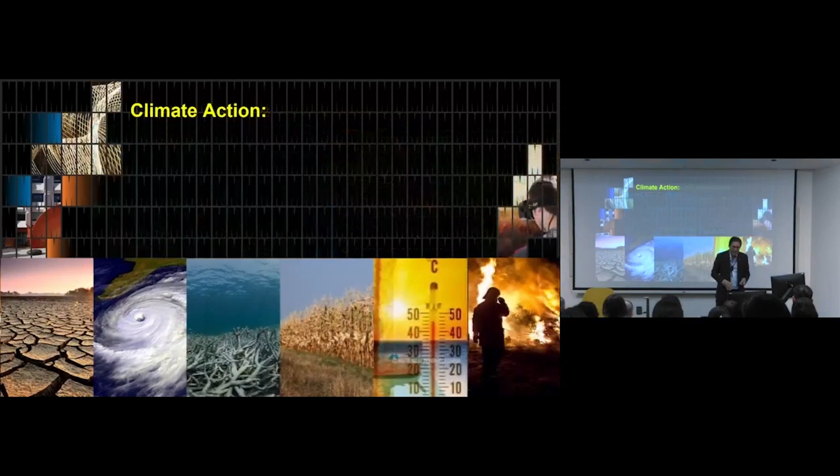Why it is significant is that there is a realization that with temperature increase, change in climate is before us, is here. Whilst the effort to try to control and reduce emissions and reduce temperature rise is still very important, we actually have to act very quickly on initiatives for climate adaptation. Because you can reduce your carbon emissions as much as you like, but the reality is that there are extreme events happening that would not normally happen in the past. Now, with climate adaptation, I just want to make this point: a significant part of the impacts of climate change are manifested through water.

Droughts, floods, pollution and degradation of water quality lead to diseases, or indirectly impact food security, public health, even how we respond to heat waves and wildfires. When you look at the context since the beginning of climate issues, climate mitigation was the real focus, and it seemed to be in the domain of the energy people, while we were largely sitting on the side looking at what's going on.

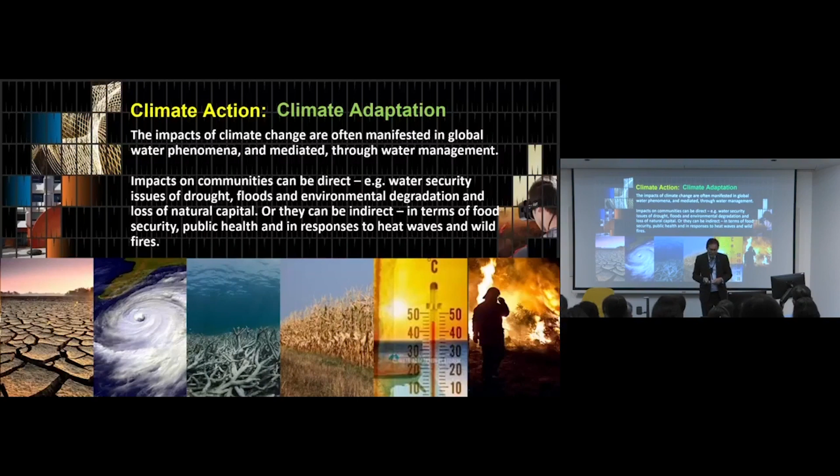But that shift to climate adaptation, and the realization that so much of climate impacts are manifested but could be mediated through water, really requires those of us in the water sector to step up and take leadership in climate action. Now, I come back to the Agenda 2030. My research group looked at the 169 targets in the 17 SDGs and asked whether water management would directly contribute to attaining those targets. Our conclusion is quite compelling: 50 of the 169 targets are directly influenced by how you manage water, and a further 34 are indirectly influenced. All of the targets under SDG for sustainable cities and communities are influenced by water in one way or another. Of course, water and sanitation goes without saying, but even industry, innovation, and infrastructure - water can help support that and a whole bunch more.

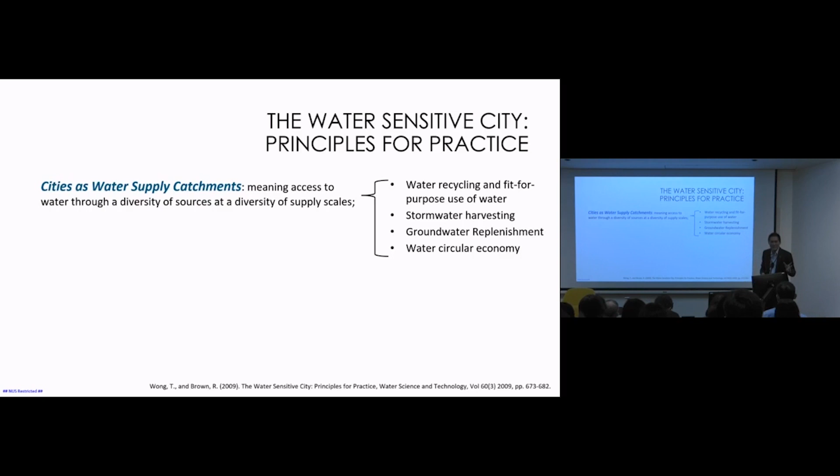And what are some of the practical examples that you can refer to with this principle? I'll start with Singapore. Singapore, over time, has actually developed a policy that ultimately led to its Four National Taps policy. Yeah? It is really a strong effort to do that. And ABC Waters was in fact chasing, if you like, the last bastion of water sources—rainwater, stormwater—not a drop to be left unharnessed.

But that is, if you like, the type of policy position that drives this concept. It may not be, and I am sure it wasn't, when PUB and others conceived the need to diversify its water sources, but it is nevertheless driven by, whether it's stated or not, this concept that we need to diversify. We can't be dependent on one source—way too vulnerable.

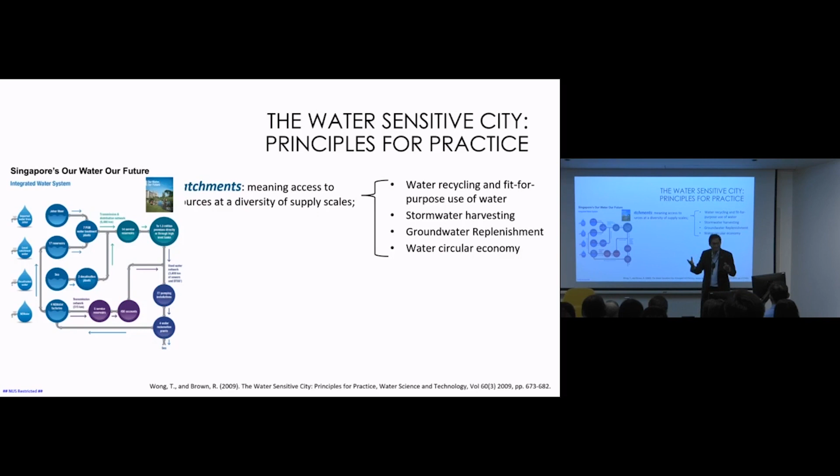We move through the notion of looking at diversity of supply scale. Are there things that we can harness locally? One of the things you need to remember is that moving water around is expensive business - 1 cubic meter is a ton. So if we can harness locally to reduce the amount of water that we need to move around, then we are creating that environment.

There are other examples of the same concept, perhaps in different contexts. This is what I want to stress, that the same principle is delivered in different forms, whereby if it wasn't pointed out to you, you may think there are different strategies. In Melbourne, we are developing Fisherman's Bend at the moment, a whole new precinct accommodating 120,000 people. The trouble is that it is in the city, whereby Melbourne, like any other traditional city...

...still gets the majority of its water supply from the big dams outside the city. And much of its sewage is collected and pumped to another treatment plant called the Werribee treatment plant elsewhere. Now, what happens when you renew an area and put 120,000 people in there? You need more water, and you got more sewage. What do you do? Do you duplicate your water supply pipes coming into the dam, build another dam? Just think of the infrastructure costs. And do you then build bigger pump stations to pump the sewage to the farm?

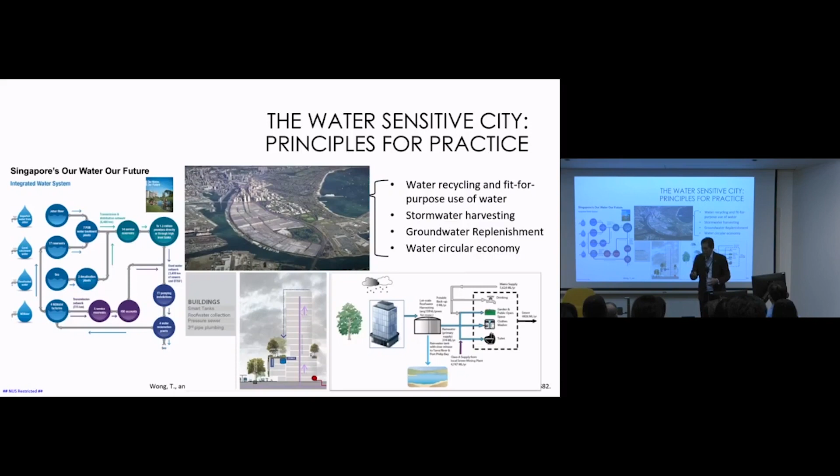I move to the next one, again in Australia, in Adelaide. One of the things I want to point out is that as you move from the east - Sydney and Melbourne - across to the west, the climate gets drier, but more importantly, more seasonal. There are distinct dry periods, and then there are distinct wet periods. In Adelaide, they started to harvest stormwater, run it through wetlands to treat them, but usually when it's raining, there's usually too much water already.

And in the dry period, evaporation is a killer. So what do they do? They decide to inject that water into the ground in Adelaide. So they harvest locally, look at groundwater injection as a means of storing the water, and when the dry season comes, pull the water back out. So now the reservoir is underground in your aquifers.

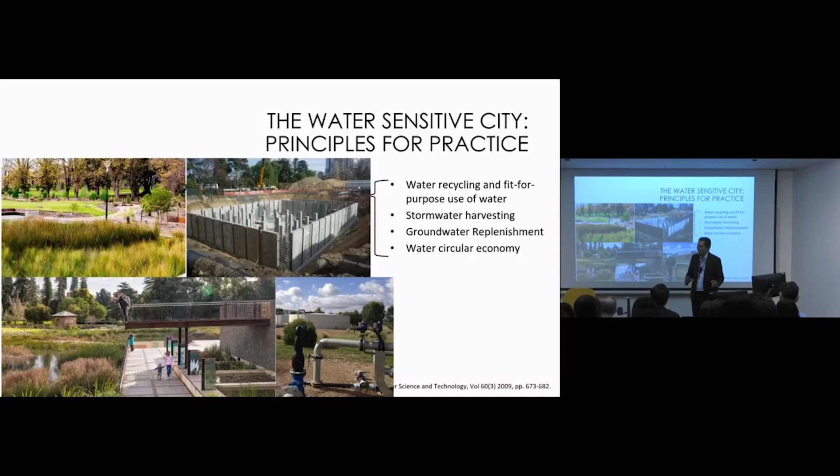In Perth, as we go further to the west, where there's hardly any water left due to climate change, they have gone one step further to say, we're going to do a whole bunch of research to look at what level of treatment we would do to our wastewater so that we can inject that into the ground. So they are now harvesting their wastewater and basically looking at groundwater replenishment - from managed aquifer recharge as a concept to now groundwater replenishment systems.

And a month ago, we had a delegation from Abu Dhabi asking specifically that question, as they are resigned to the fact that they need to have a desalination plant - they can't avoid that.

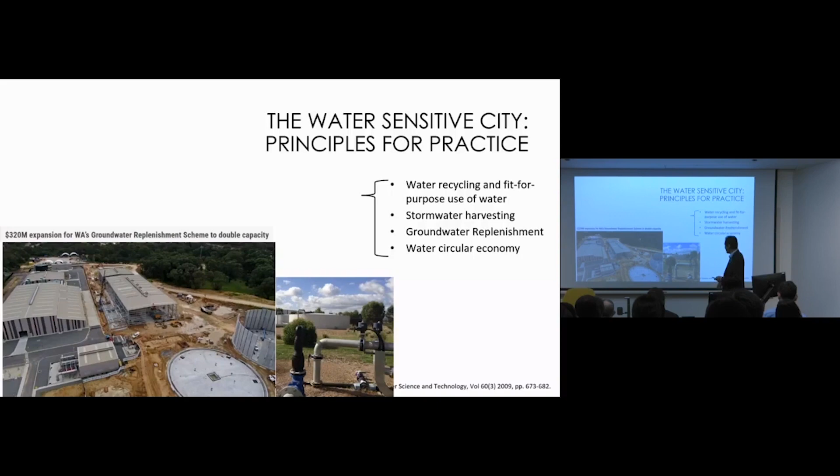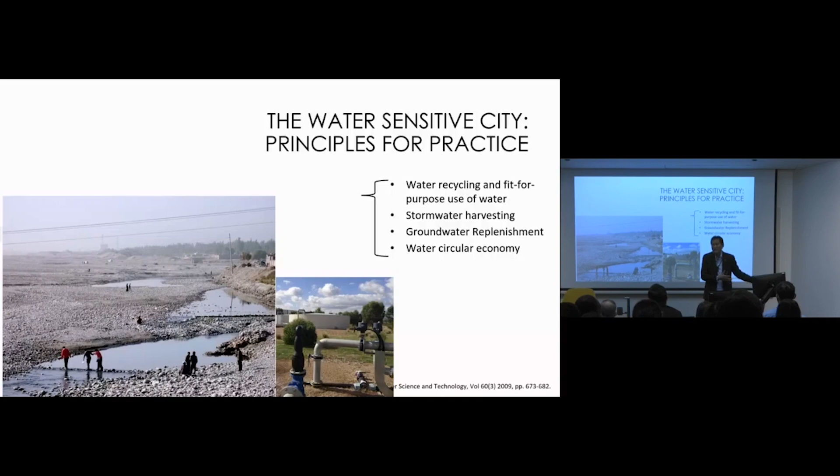The project I was involved in China, in the city of Hetian, Western China, a desert country. This is one of the main rivers there, and the opportunity was to do with snowmelt. In summer, significant snowmelt has led to a huge amount of water through this river. A simple strategy was to look at how we can harness snowmelt and infiltrate that into the groundwater system as a means of harvesting that water.

Now, not everything is as nice and simple as that. One of the reasons why I wanted to impress upon you the different contexts of cities as water supply catchments is the notion of small island developing states.

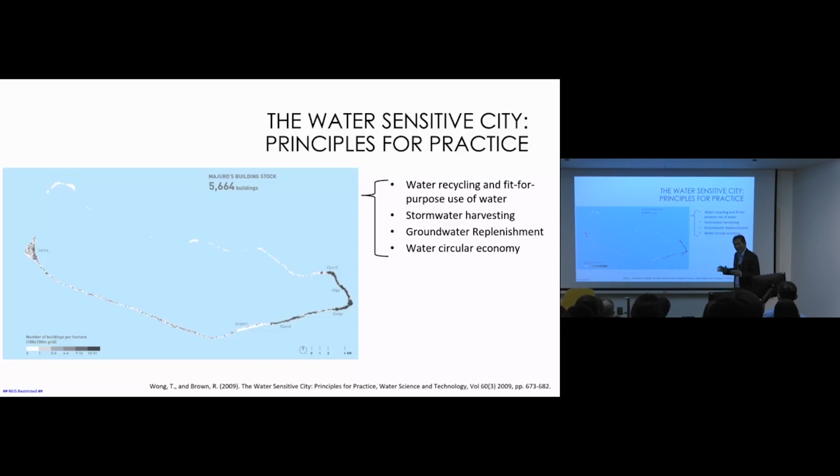This is Marshall Islands, and they have problems. You might think their problems are from sea level rise. This is just a blow up of one of the two cities there. But their biggest problem is actually saltwater intrusion into their groundwater system from sea level rise.

That problem has really occupied a lot of my mind in terms of how you introduce such concepts there, and honestly I don't have an answer. There's not enough rain, and even when it rains, there's not enough catchment. Their groundwater system, which they try to store water in, is continually being contaminated by seawater from sea level rise. So it is an important issue.

This issue is of course coupled with sea level rise, and this is the prediction of the flooded areas, which prompts me to think that one of the things we might learn from is Singapore's coastal protection initiative. What is it that we need to do to actually think about coastal protection and the economics of that?

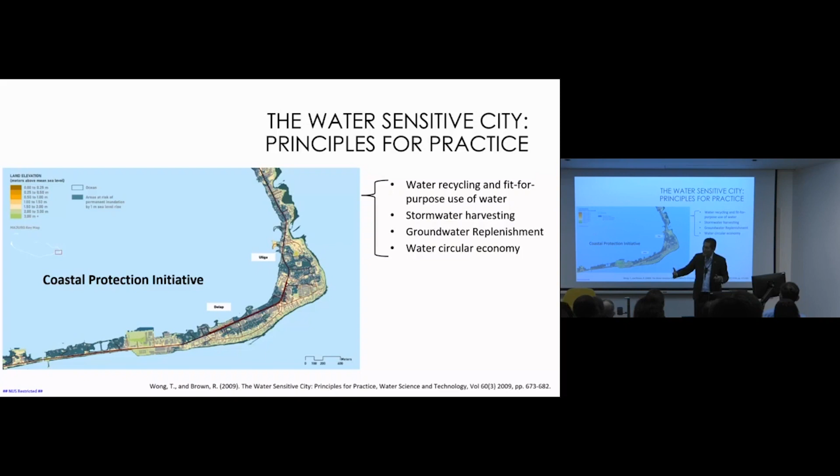How could poor nations like this learn from the interrelationship between infrastructure for coastal protection and the economy they want to generate from there? We've seen some snippets of this in Fiji. Last year they introduced a blue bond leading to coastal protection, where the whole notion of coastal protection is part of land reclamation, which is then linked to private sector investment for aquaculture, lobster farming, in that sense. So the need for a business case really needs to come into it.

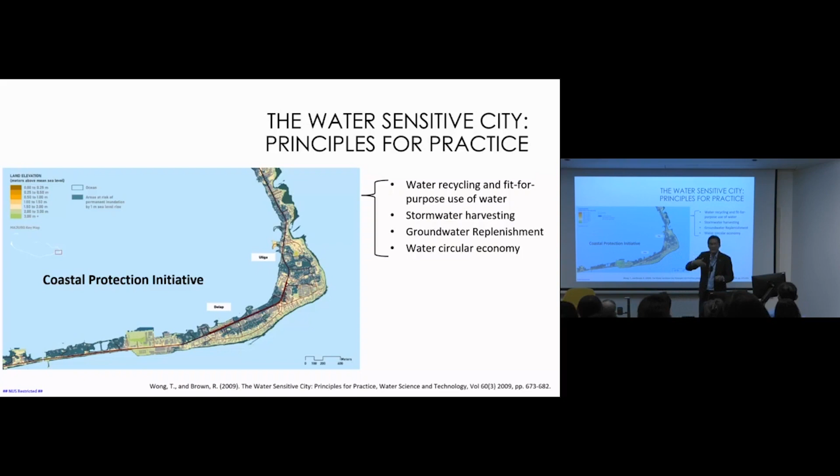Which brings me to this topic - I've diverted because all I've heard about in the last few days is the Long Island project. I asked, what is this Long Island project? And here it is, an incredibly ambitious Long Island project. A number of observations I'd like to make: as conceived, it's really to some degree a souped up version of Marina Bay. You guys have great experience delivering Marina Bay, and now you're much more ambitious to do that, and that's great.

The question I do have is the sustainability in terms of water quality management of that water body. Marina Bay is blessed with a large catchment, and this regular recirculation and flushing helped maintain its water quality. I also believe, and this is just my belief, that Marina Bay was one of the catalysts for ABC Waters. ABC Waters, at its very core, was about how you introduce systems throughout the catchment to cleanse the stormwater before it even gets to Marina Bay - how you avoid all the conditions conducive to poor water quality and algal blooms due to pollution from catchments, and how you manage that.

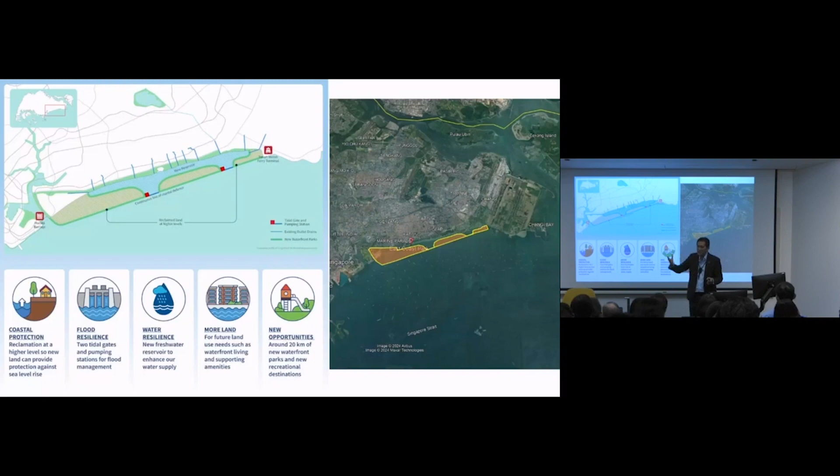It's going to be a little more difficult when you look at the size of the water body and the size of the catchment that drains to it. There will need to be further thinking about how to maintain water quality in the Long Island project, which, if you look at the context, is less exposed compared to Marina Bay. My understanding, when I first came in 2005 and looked at the data, was that even Marina Bay was at times at risk of water quality problems, which prompted the need to retrofit the catchment for cleansing.

Which leads me to the next principle of practice, that cities need to be designed to provide ecosystem services. Some of the obvious ones are nature-based solutions for water, creating ecological landscapes and corridors for biodiversity, urban microclimate enhancement, water cleansing, waterway rehabilitation, and flood mitigation. So we should design our cities to deliver all of this while at the same time greening our cities.

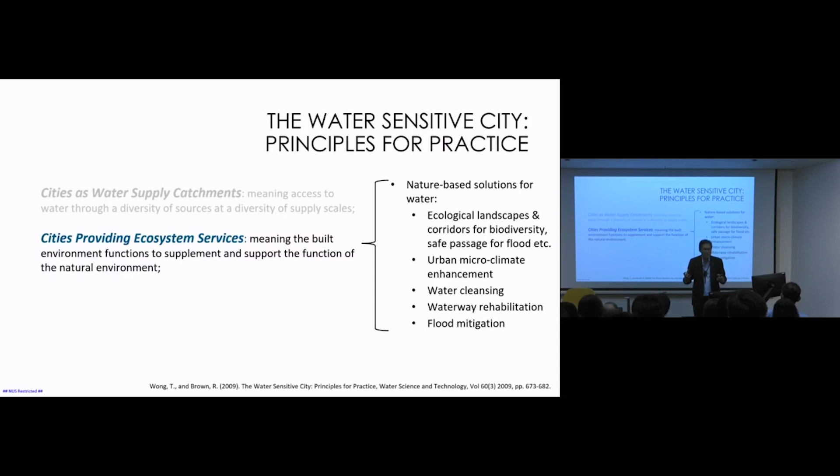A question always asked of me was, what do I think about ABC Waters? I'll be the first to admit that when I was part of the team here, I often felt like the poor cousin in ABC Waters, because if you look at the investment to activate sites, that's the A, beautify the site, that's the B, and then clean. There was a huge amount of urban design investment in activating sites and beautifying them, and only then do we start to work on the delivery of systems to actually keep the system clean.

What might those systems be? I'd like to show some examples from the Singapore experience. Most of you will recognize this picture from Bishan Park, and the biotopes that were designed to provide the cleansing. Meanwhile, a small team among us, which I had the great privilege to be part of, was already testing the rain garden in Balam Estate.

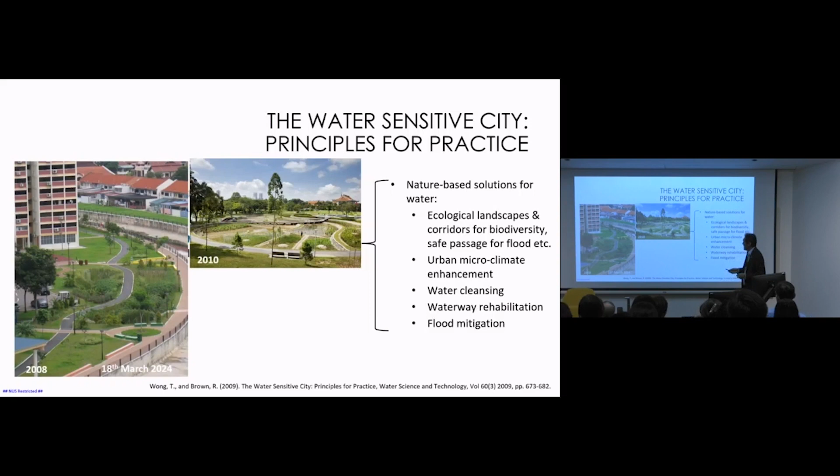It was constructed in 2008. I went out to look at some of this. This is just a snippet of our construction program for the rain garden in Balam Estate. I went out to Bishan Park last year, and it really has held up well. This is now 13 years after its construction.

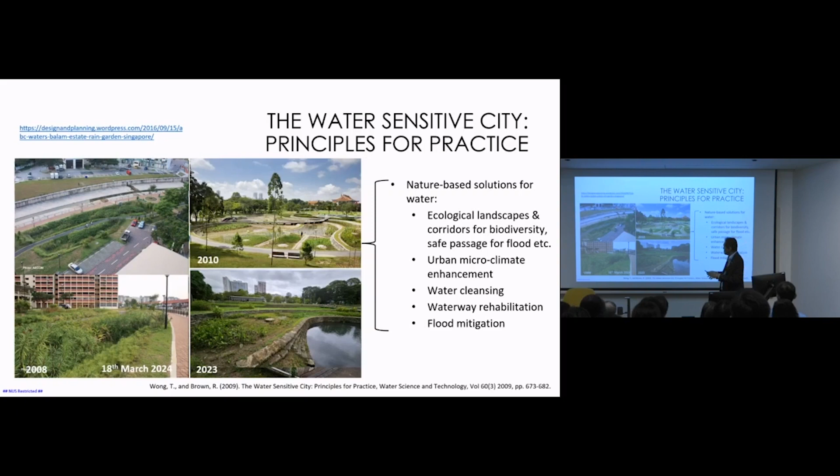I also took the opportunity while I was here to go out to Balam Estate, and this is what I see. This is 15 years on. It really demonstrates that if there's anybody who can maintain infrastructure well, it's you guys.

By the way, there's a picture here of me about to be run over by a bike. Did the bike come past already? It did. So I'm about to be run over by a jogger there. Got a bit too enthusiastic.

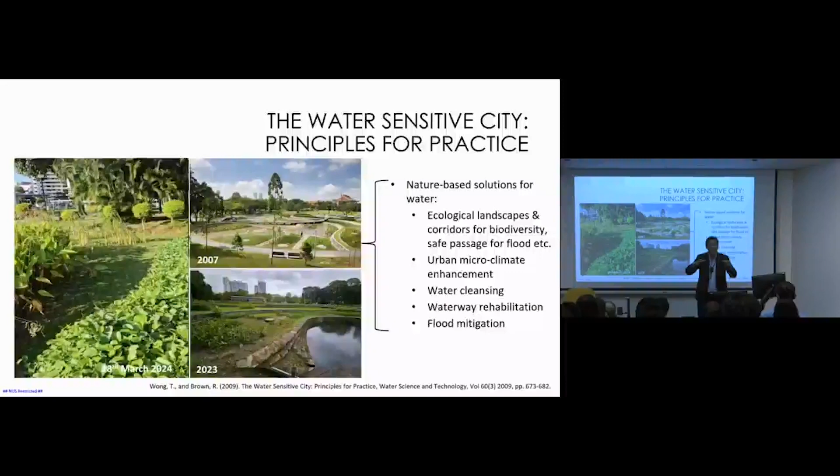But the rain garden bioretentions are basically designed to soak up the rainwater that comes through, filter it through a filter medium, and then discharge into the canal, finding its way into Marina Bay. I was really impressed with this.

But at the same time, there are other ABC Waters features that perhaps aren't doing so well. In fact, I know of one that has been demolished, which I'm disappointed about, and I wonder why. I think I do know why, in that while demonstrating this concept, there is still work to be done on how different agencies come together to co-invest and co-own these things. My understanding is that this particular project, an amazing wetland we designed next to a park connector, got removed because it was replaced by a park connector. From memory, we had to negotiate with NParks to get compensation, arguing that the park connector in certain sections doesn't always have to be 3 meters wide. But I guess we lost that argument.

My point here is that Singapore has demonstrated experience of how you can integrate nature-based solutions into urban landscapes that serve almost like kidneys in the city. And if you can do that, then the water downstream, like in Marina Bay, would be protected.

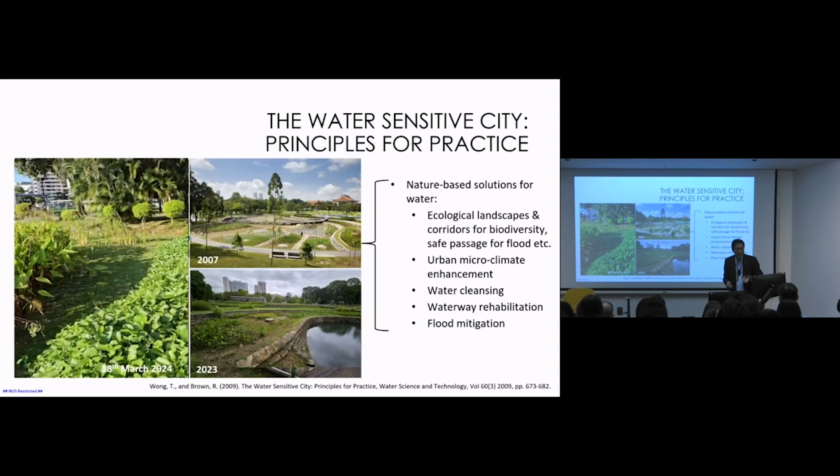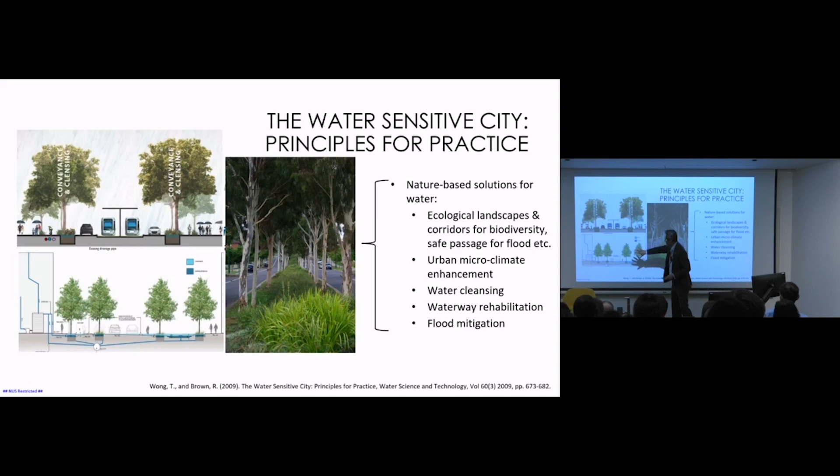This is not exclusive to Singapore. I wanted to show Singapore first because I'm in Singapore. This is in Melbourne. This system was the very first one we built there, nearly 30 years ago. The trees have grown, but this provides a significant level of flood protection for the region, and at the same time provides cleansing. Flood protection when it's flooding, but when it's just raining, that water is cleansed by this system, and the same concept is now being introduced further and further into downtown Melbourne.

This is something we did in Kunshan, China, where we formed a partnership with the city of Kunshan, and in the space of 10 years, completely transformed the whole city. That's because, like most Chinese cities, they were being developed like there's no tomorrow. Before now. Now they have no more money.

Their quest for knowledge and innovation was amazing. It was a fantastic place to work in. I was the CEO of the CRC for Water Sensitive Cities, set up by the Australian government to transform Australian cities, and I found myself actually working in China because it was much easier to transform the city of Kunshan than it was to transform the city of Melbourne.

But we were introducing all of these nature-based solutions into buildings. We then basically said, hey, what are you guys doing in major infrastructure development? And they said, we're building a high-speed rail, we're building a ring road. And I said, look, that is the corridor we should take real advantage of. And they said, yep, fine.

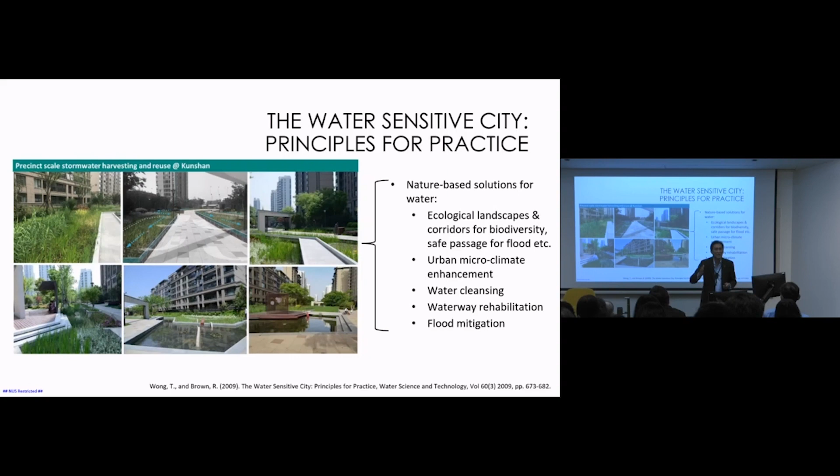And this is what they've done. Every road corridor and high-speed rail corridor along there is equipped with nature-based solutions that do water cleansing and flood detention throughout the system. All of you would recognize that road interchanges are a bunch of poorly used space, which we captured and addressed. Kunshan just two years ago won the government award for being the sponge city, the exemplar sponge city for China, and this is a county-level city.

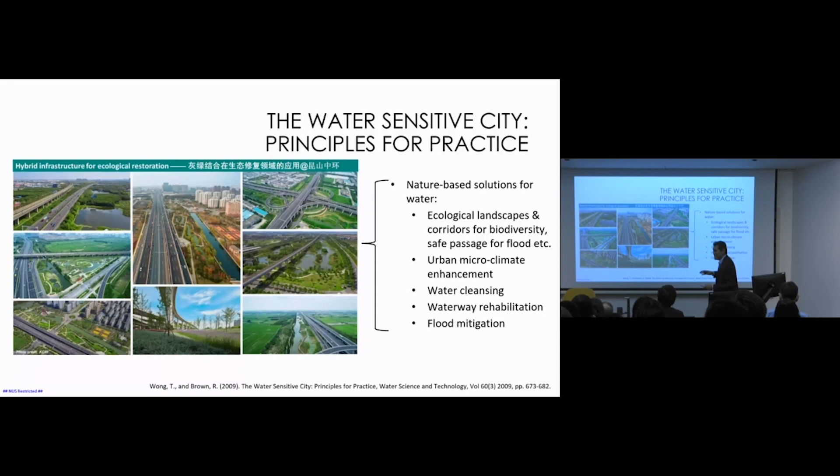But enough of boasting, I want to come back to Singapore. You guys have done that too, in terms of the importance of corridors. There are two things that frame a city: the drainage corridor and the road corridor. What you do there actually frames how green your city can be, how well managed its water would be in this case. And the bold decision — I need to acknowledge that all of these pictures actually came from Herbert Dreiseitl's website.

That bold decision, which I credit Mr. Khoo here as one of the drivers, really gives us a vision of how you can transform your cities by maintaining corridors but actually revitalizing them through the type of work you see here. Its ability to maintain flood conveyance means you can have that livable space that provides all of those ecosystem services I talk about.

Back to China, to finish this point — the introduction of ecosystem services in cities cuts across all scales. What you can do in individual buildings in the forecourt, all the way to what you can do in huge transport corridors. If you combine all of that, you'll find that the receiving water, your rivers and creeks, will be protected.

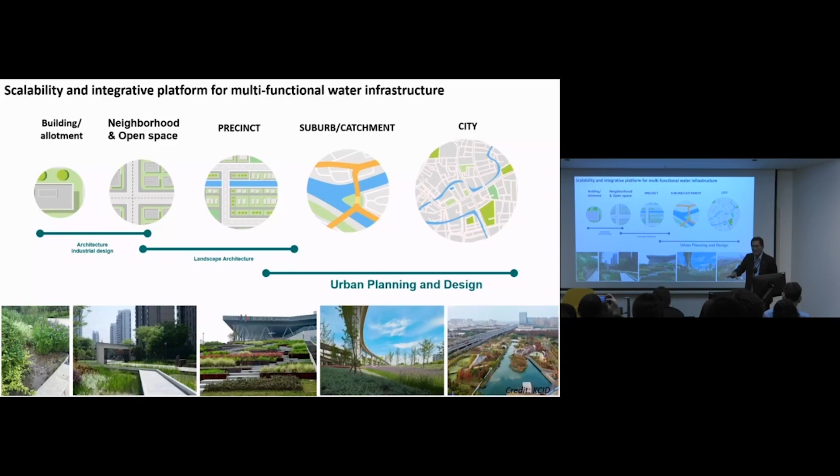I'd like to finish with this whole notion of cities comprising water-sensitive communities, and I make three points. What is a water-sensitive community? First, government is able to develop what I refer to as enabling policies — not prescriptive, but enabling, to enable innovation.

The water sector, the professionals and practitioners in our city, need to be equipped with tools and knowledge to enable them to innovate. And the community needs to understand their relationship with water, their exposure to water, and how their actions influence water.

Now, on the surface of it, this is a very basic, generic principle of practice. Here we talk about how you actually help government develop policies that recognize the need for context flexibility. Policy that is prescriptive is just no longer relevant. How do you do that? How do you provide evidence to do this? How do you introduce innovation to our sector?

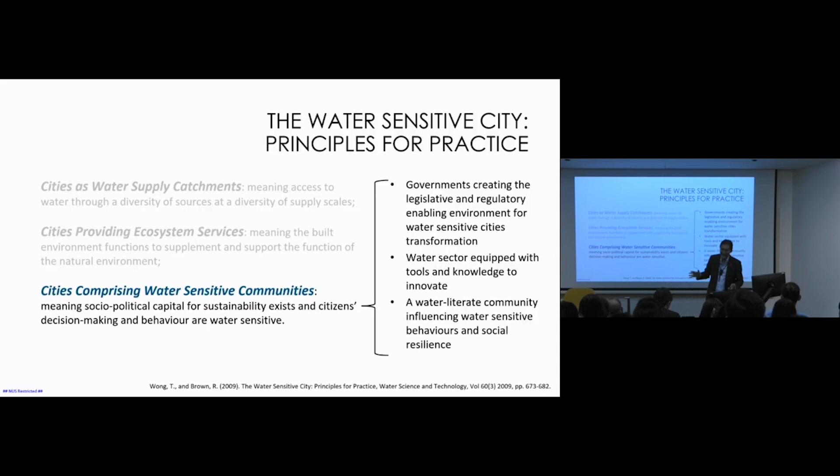Courses — undergraduate courses, postgraduate courses — and the power of demonstration. I keep hammering about the importance of demonstration, taking government officials and practitioners to see those projects. How do you encourage people to understand why that rain garden at Balam Estate is full? Why it's important to maintain it, why you shouldn't dump your rubbish into it — not that Singaporeans do it, but I can tell you other countries would. So that is the three things that drive that principle.

And of course, I come back to Singapore. Policy — what drives ABC Waters? What drives the diversity of water sources? In terms of the water sector...

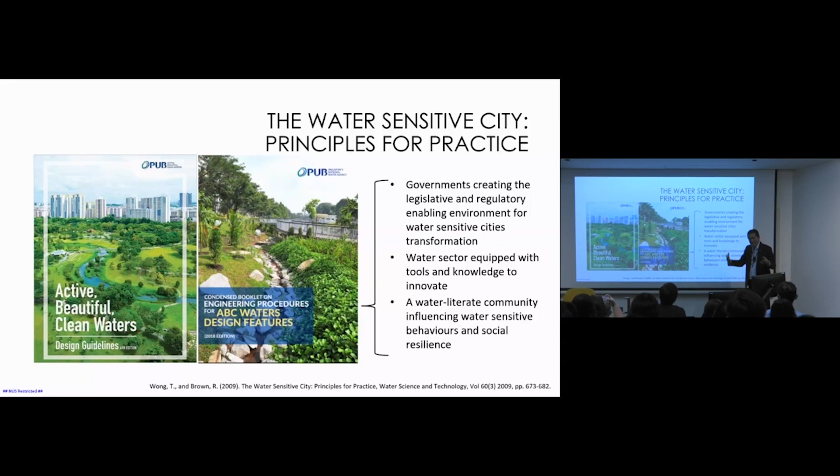Ability to innovate — again, PUB have really, over these years, I've just been continually impressed and amazed about the type of technical guidance and design guidance that help foster the implementation of that. Really important in building that whole development of a water-sensitive city.

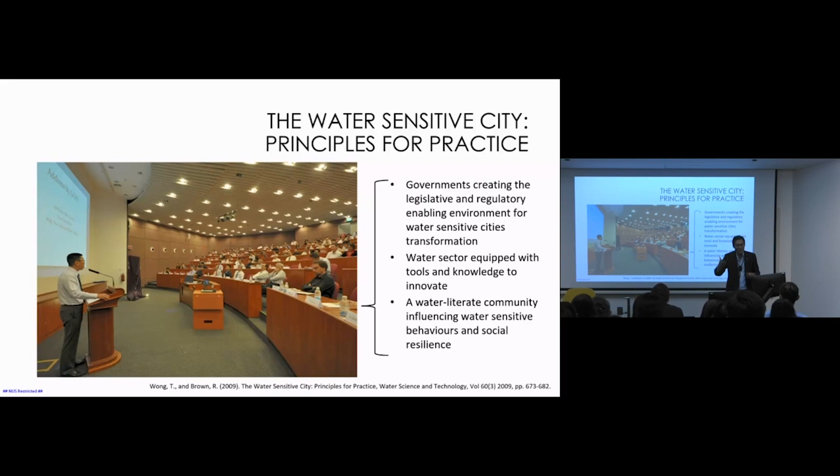And of course, I'm not sure whether this is still running, but when I was there, the introduction of accreditation courses sponsored by the engineers — the Institute of Engineers, as well as the Institute of Architects — started to ensure that professionals have the knowledge to design and oversee construction of such innovations. Again, you can see how every one of those principles I touch on has an example of what the Singaporeans are doing.

I just want to finish by talking about the emergence of digital technology and how that is also changing the way that water is being managed.

Real-time control, sensors, and automation are now here to actually help us improve on our actions. First of all, real-time controls in terms of fit-for-purpose water harvesting.

I'm not suggesting this is done here, but many cities divert water from the river as part of their harvesting, and what they divert is actually dependent on the quality of the water. That can significantly improve the efficiency of your water treatment facilities. Similarly, the operation of your water treatment or wastewater treatment plant to increase energy efficiency and reduce wastage is now possible through digital technology, helping the water sector deliver much better performance.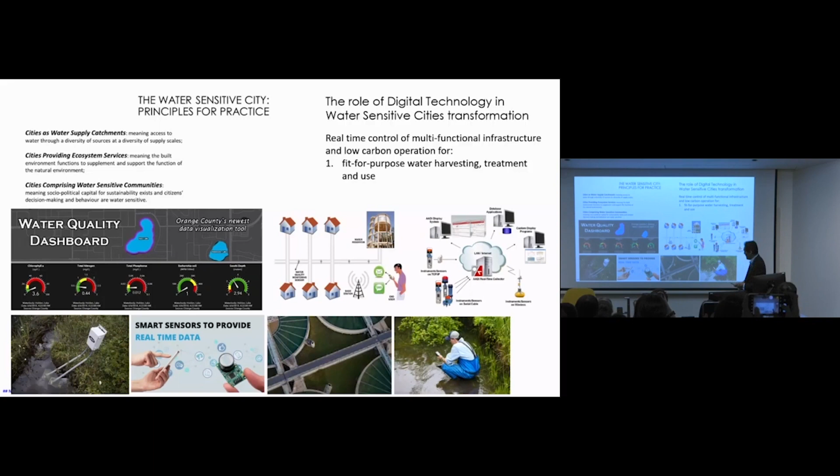But there are also real-time control management systems that influence the way we manage floods, like connecting flood forecasting with information to the community. In some places, the automation of floodgates is linked to this as well.

One example I'm really pleased about and want to encourage is this smart tunnel in Kuala Lumpur. I've seen it in operation - it's a transport infrastructure that also serves as drainage at the bottom. When it floods, they close off lanes to let flood water through as a flood mitigation measure. That whole connection is really impressive.

Another thing that impressed me was a colleague in Korea, at Seoul National University, who conceived and demonstrated a concept for reducing flooding in a built-up area. Urban renewal is about increasing the building stock of your city, but it often needs to accommodate existing drainage infrastructure, because that's really expensive.

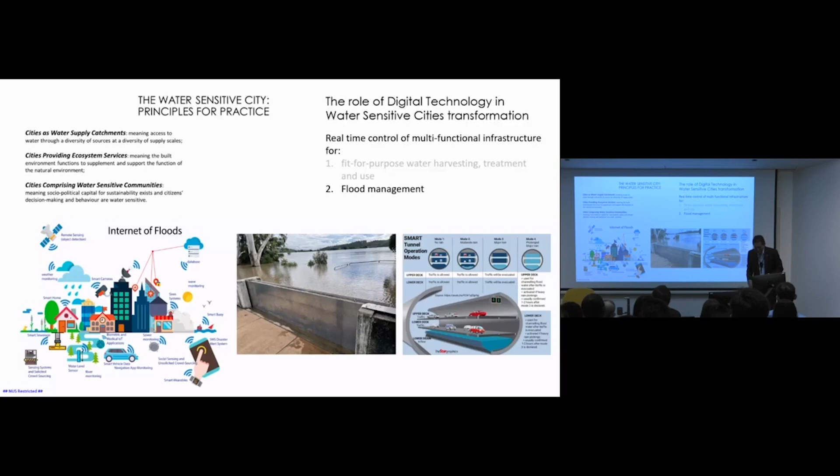I'd like to show you this video that Professor Han has pioneered. This is his life's work, and I really want to acknowledge that. Let's have a look at the video.

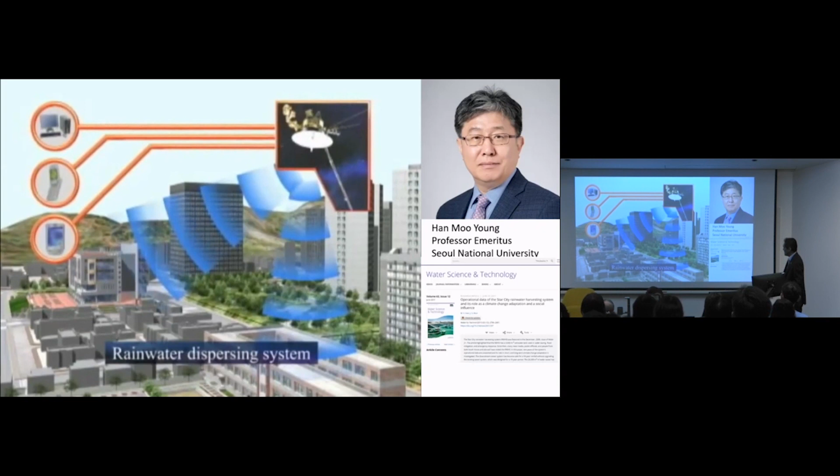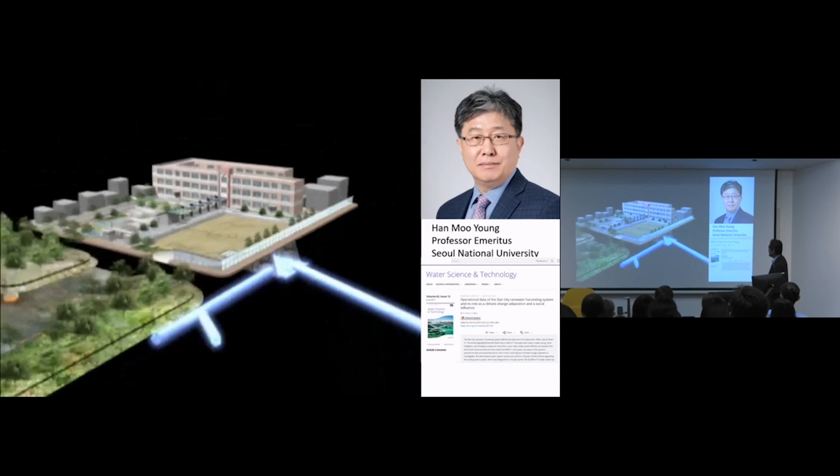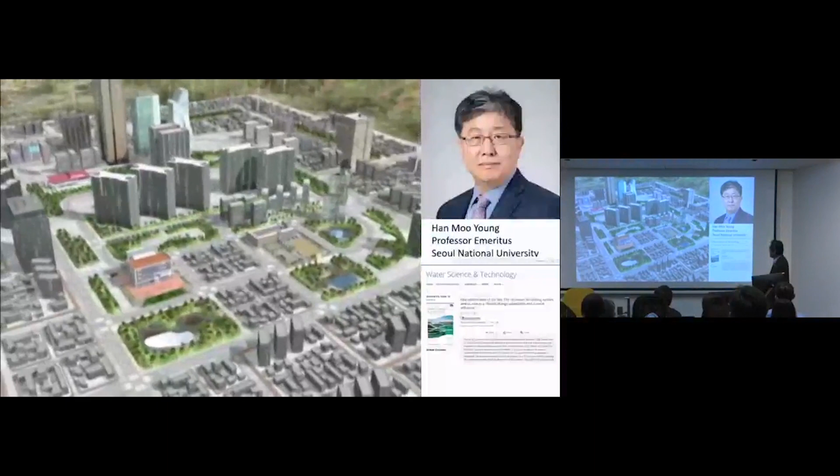Seoul Metropolitan Government also announced new plans for rainwater management. The most noteworthy idea was a remote monitoring system that uses the internet and satellites. The critical factor is that using remote control, it can empty the rainwater tank in each building within just 5 hours. The water flowing out of these tanks will be directed to nearby streams or undercurrents to avert overflowing of the rivers, and the emptied tanks will hold rainwater again. It is a world-first technology that can prevent flood damage resulting from torrential downpours.

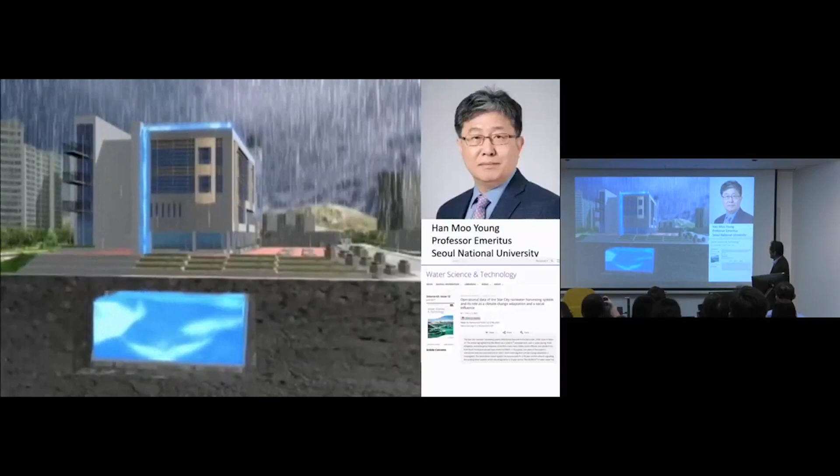So the concept is that when your density is really high, the majority of your impervious area generating drainage is actually your roof. If all of your roofs are connected to a rainwater tank, not only are you harvesting water to use in the building, you can now use this as a flood management control, which is what we're now adopting in the Docklands precinct.

It does require us to be able to forecast rain well, almost nowcasting. What they've done in Korea is be able to see the movement of clouds and see that storm clouds are coming. In anticipation of that storm cloud raining, they discharge their rainwater tank, so that when it rains, all of the roof area does not contribute to drainage.

It all gets stored back in the tank, and suddenly you find that an area that might be 80% impervious actually behaves like it's only 20% impervious, because the majority of the rain is stored in the tank by preempting the rain, discharging, and creating capacity for the tank.

We've done further analysis on Professor Han's concept looking at Melbourne, and worked out that if that rainwater tank was connected to even the top 3 residential floors, water usage would be such that the tank is generally empty. So you don't even need to rely on good forecasting.